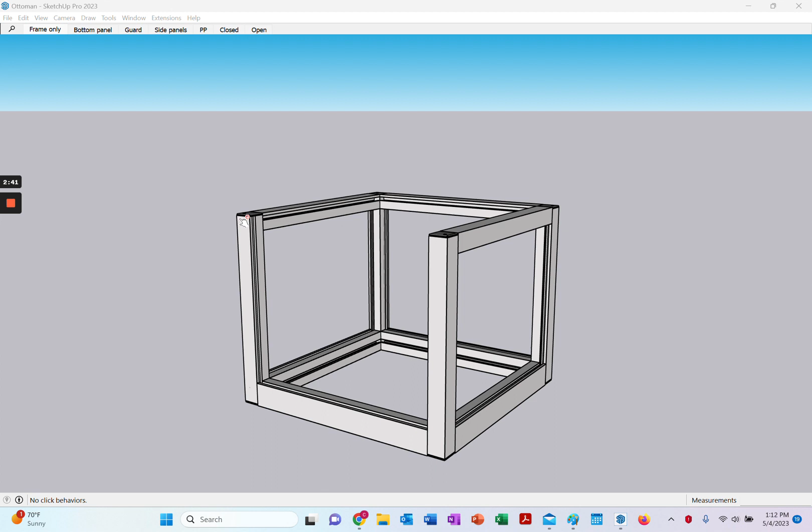So this is just the framing, and we use end caps. These are plastic end caps for all the posts, just so none of that framing is exposed. None of those extrusions are exposed. But yeah, let me show you how we're putting this together. So this is the frame only for this particular cabinet, mini cabinet.

The next thing that we'll be putting in is basically dropping in a 1/4-inch HDPE panel, which will essentially be the place where the porta potty is going to sit. And we are going to notch this at the 4 corners. So it's got support on all 4 sides, and it's a relatively small piece of material, and it will support a lot of weight. If this was a larger section, 1/4-inch HDPE probably wouldn't be appropriate. We'd probably need to bump it up to 1/2 inch or 3/4 inch. But because this is a really small space, it's basically 18 inches square, it's fine. So that's the next thing we'll do.

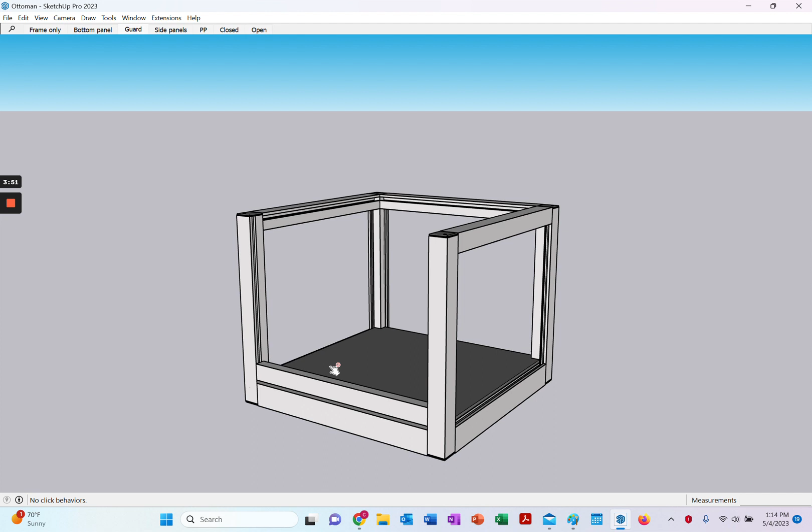And then after that, we're putting in this profile piece of aluminum extrusion. This is yet a 3rd profile type. We're calling it a guard. It's basically there just to keep the porta potty from sliding out through this open space in the front, and just making sure the porta potty stays put inside this cabinet.

Okay, so the next thing, side panels. So these are captured panels. They fit into the T-slots. They're going to be gasketed so that they won't rattle. We've been using this 1/4-inch HDPE pretty much on every cabinet build we've done, and we really like the material. It's fantastic. It looks great. It's easy to work with, so it's really good stuff.

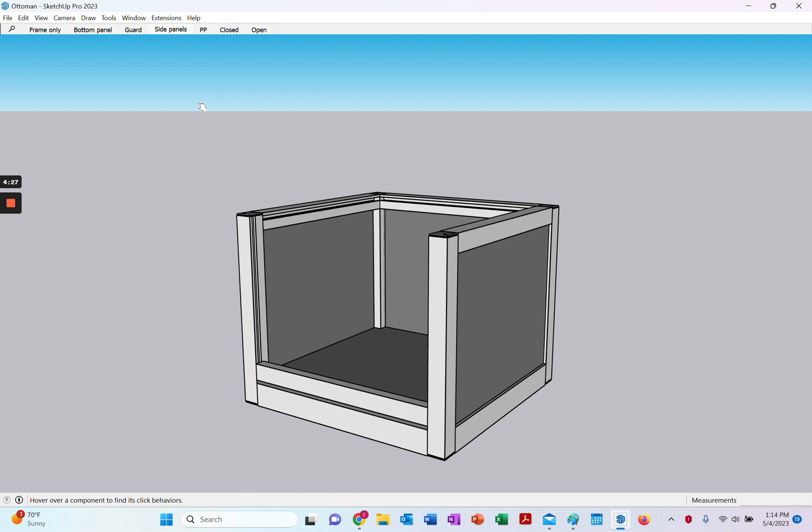Okay, so not the last thing, but the next thing is the porta potty itself. So we're going to be using a Thetford, and it just fits really nicely. You can see it's behind the guard. It sits right on top of that bottom panel, so it's slightly elevated off the actual floor of the van. I'm not going to show it now, but basically to use this, you just flip open the lid and use it, and then you're good.

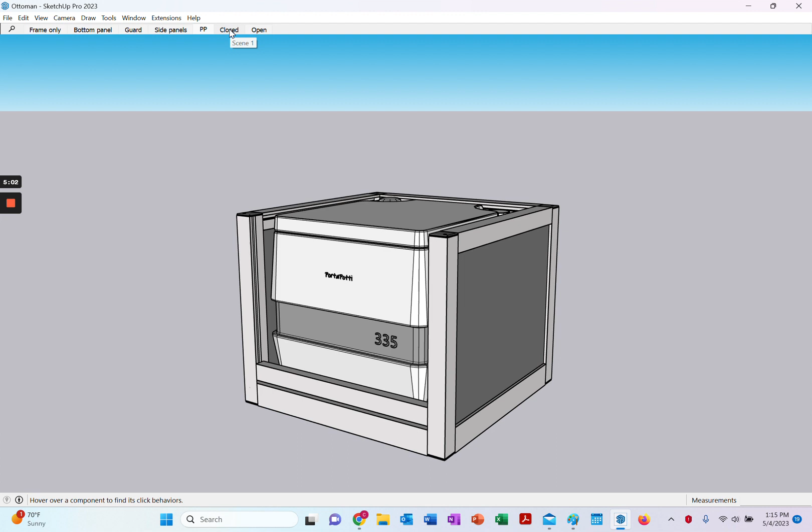The last component of this is the thing that actually makes it an ottoman, which is this cushion top. And we're using a board cushion. We're going to use 4-inch Dacron wrap foam. It's going to be very comfortable to sit on. And you can see just in the front here these rubber feet, and we have 4 of those on the underside of the board cushion, and that helps keep that board cushion in place so it doesn't move around. So it's just kind of wedged into place. There's no other attachment point.

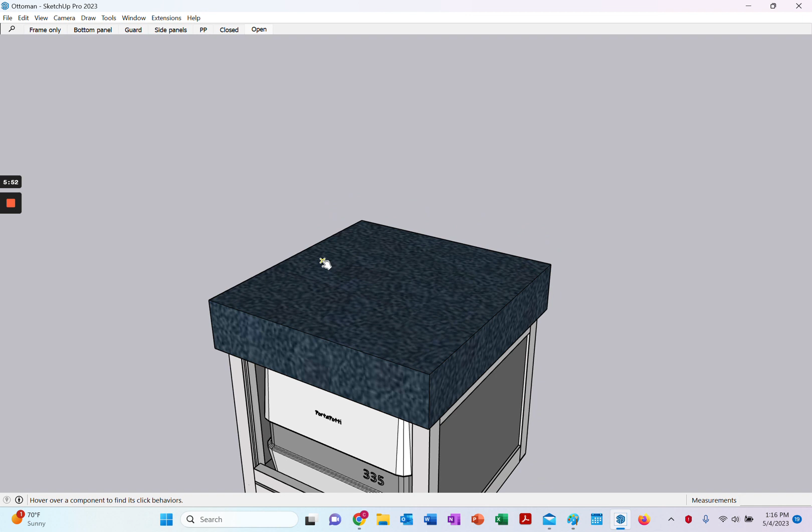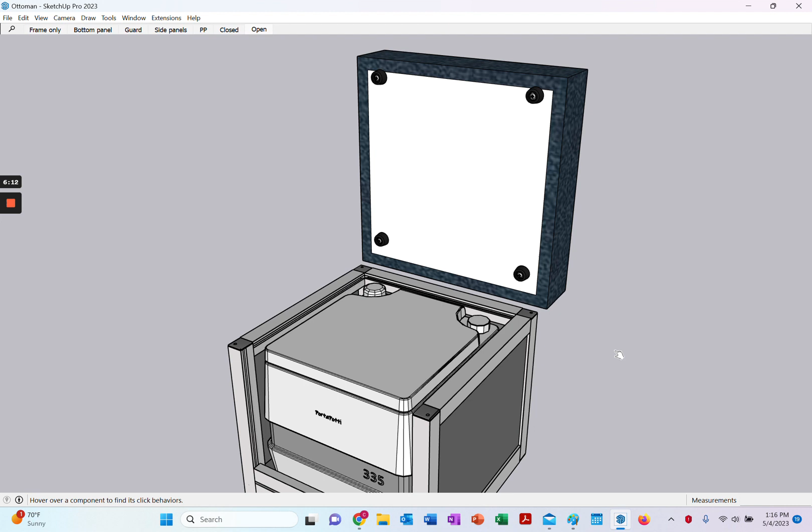And part of the idea is to make sure that that cushion top stays put, but also is easily removable when it's time to actually use the porta-potty. So that's basically that. And then let's just show this thing in operation. I just set up a very simple animation to show how that top flips. Now it's not going to be hinged, but it can be easily lifted off and just placed aside. So that's our ottoman / porta-potty garage. Let me close this back up so you can see that. I'll go back to where we were.

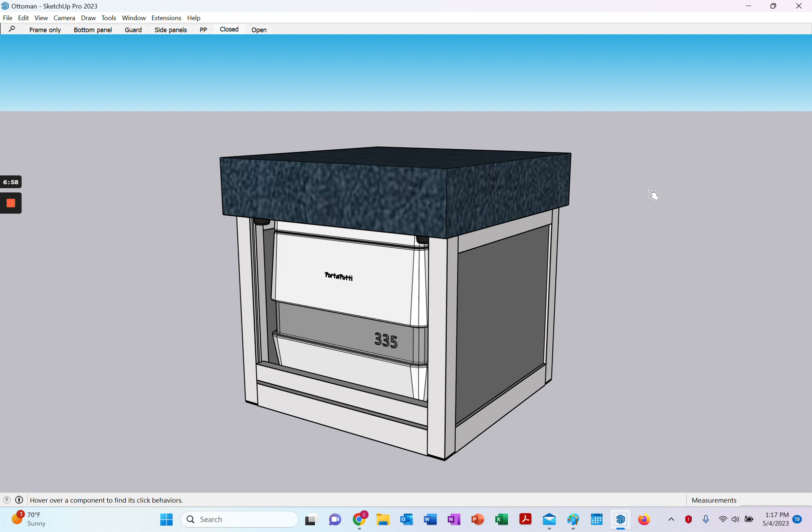So again, through the magic of SketchUp, we can actually show how we assemble things, and the importance of using SketchUp in terms of design, and also using those component importable STEP files that we can stretch, scale, move around and rotate as necessary. So it's really helpful, and we've got a great system supplier for our aluminum extrusion system, and they have some great resources that we like to take advantage of. So there you have it.